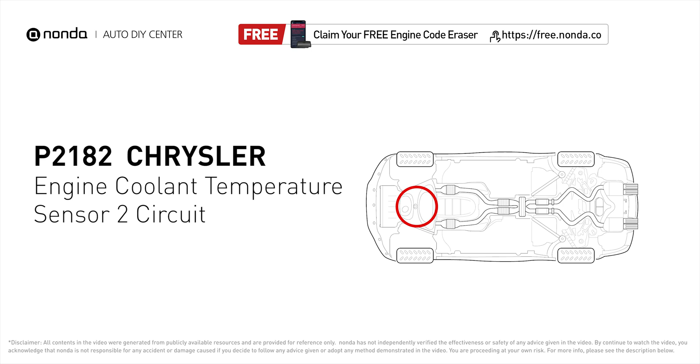It is a code for the engine control module detecting the ECT sensor number 2 does not correlate with ECT sensor number 1 at cold engine start up. Here are 3 of the most practical solutions to fix Chrysler's P2182 error code. Method A. The ECT sensor.

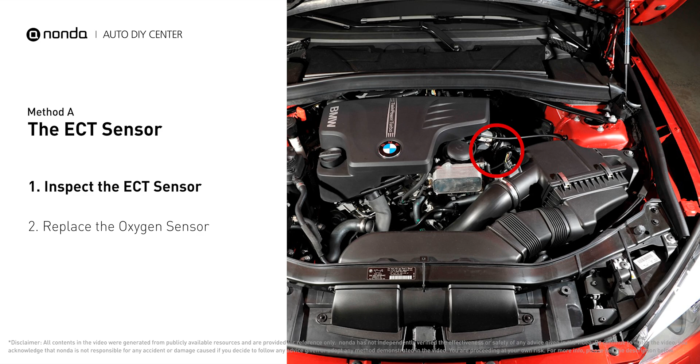In most cars, the primary ECT sensor is installed near the thermostat in the cylinder head. Remove the ECT sensor from the engine. Use a multimeter to proceed with a test on the ECT sensor. At the ambient temperature of 68 degrees Fahrenheit, the sensor resistance is between 2000 ohms to 3000 ohms.

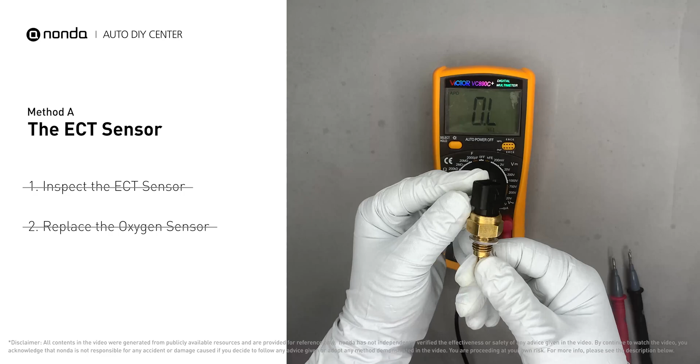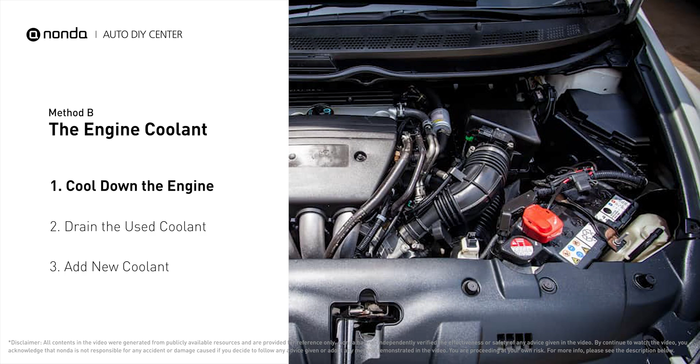If you do not get a reading, this indicates that the ECT sensor is faulty and needs to be replaced. However, if the ECT sensor has a correct reading, then we will proceed with Method B. Method B. The engine coolant. Engine coolant reservoir is often a translucent white bottle, and the radiator is the large panel at the front of the car. Cool down the engine and remove the radiator cap.

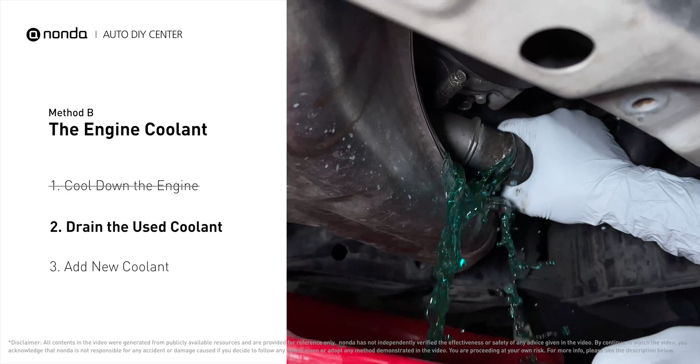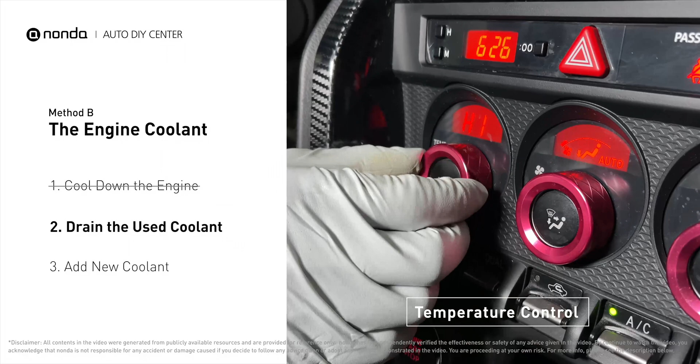Locate the radiator lower hose. Place a container underneath the hose. Remove the hose and allow the coolant to drain. To better drain out the used coolant, start the engine and turn the temperature control to maximum heat. Closely monitor the coolant temperature gauge on your dashboard to prevent engine overheating.

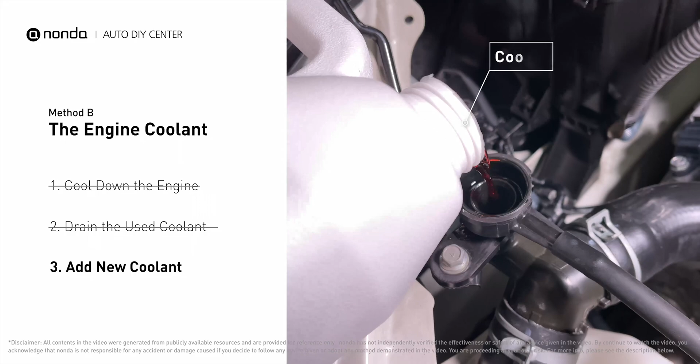Once the used coolant is drained out completely, turn off the engine and replace the hose. Next, add fresh coolant to the radiator until it reaches the base of the filler neck. And then take off the cap of the coolant reservoir, fill it with fresh coolant, not exceeding the full line, then replace the cap.

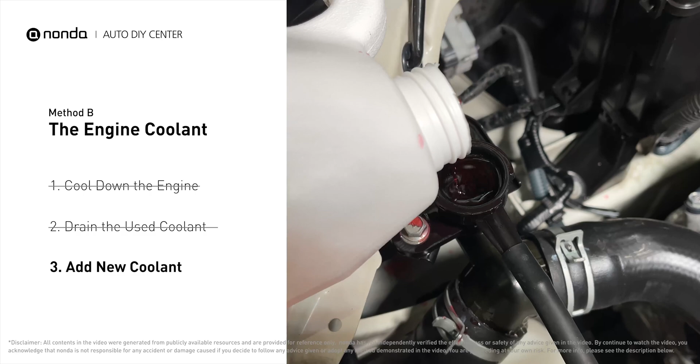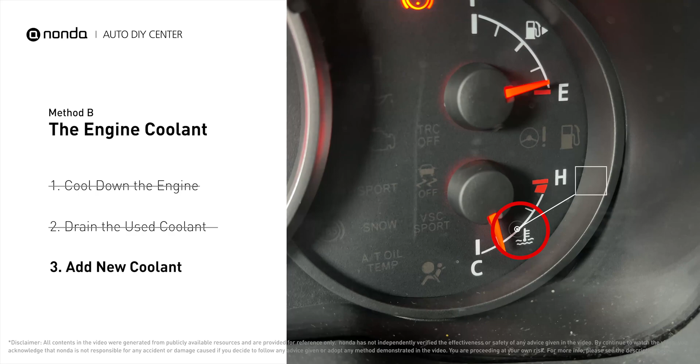After filling, start the engine, and let it idle for a few minutes to let the system purge all the air out, and then add coolant as needed. Replace the radiator cap. Closely monitor the coolant temperature gauge on your dashboard. Once the coolant temperature reaches 190 degrees Fahrenheit, turn off the engine. After the engine has completely cooled down, remove the radiator cap and add coolant to its full level.

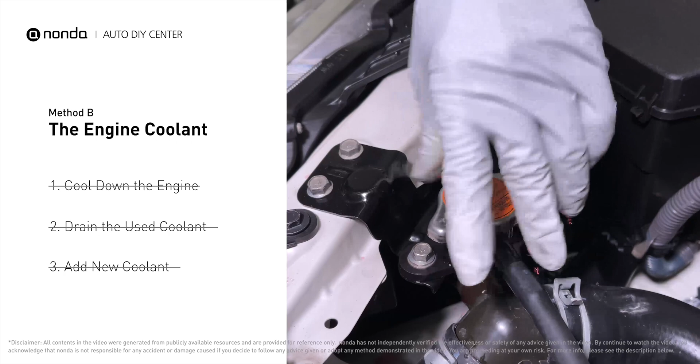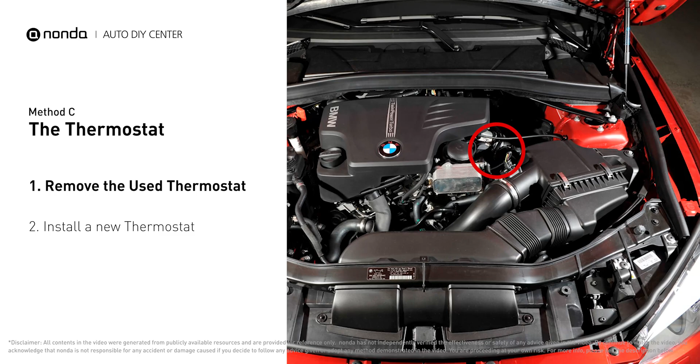Method C. The thermostat. In most cars, the thermostat is placed near the water pump on the cylinder head. First, carefully remove the thermostat from the engine. The engine has to be cool before attempting the process, and then install a new thermostat.

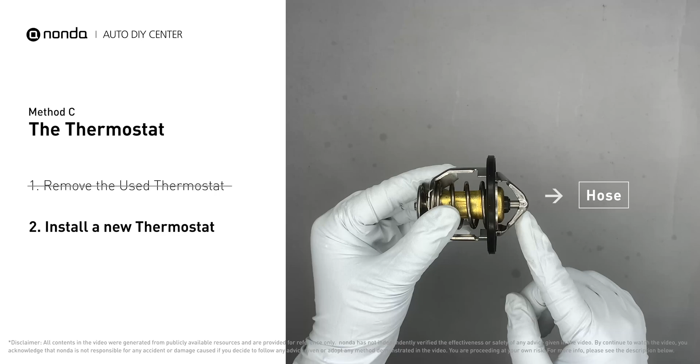To install it correctly, you need to make sure the shallow end goes toward the hose, and the deep end goes towards the engine. When you install it back to the engine, make sure the jiggle valve is pointed straight up to the top of the engine, so the air can get through the system.

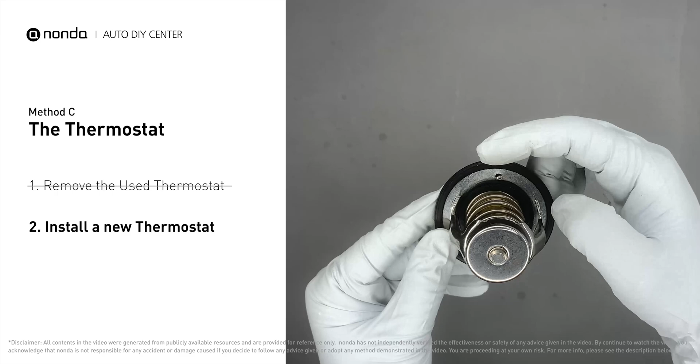So here are 3 of the most practical solutions to fix Chrysler's P2182 error code. After the repair, you can now use the ZUS app to clear the error code. And tap the rescan button one more time to make sure everything is fine with your vehicle.